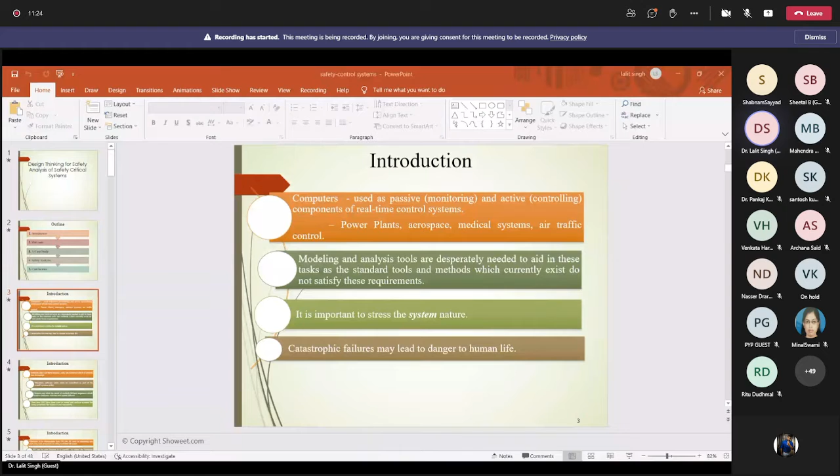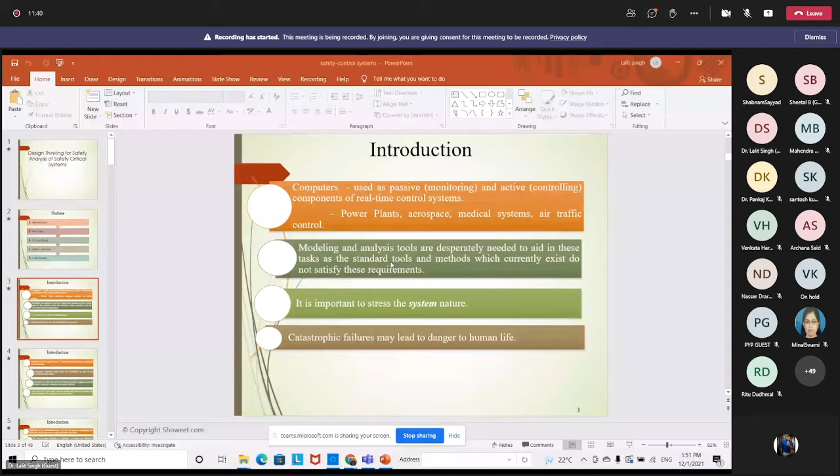Sir, so sorry to interrupt. Can you please put the presentation in full screen mode? I have put it in full screen only. Let me first stop sharing and start again. Madam, now it is coming in full screen. It's okay, sir. And the slides are changing also? Slides I can't see changing, sir. We are on the first slide. Let me then share my entire window rather than this particular slide. Just a moment. Madam, can you tell me now, are the slides changing? Yes, now it is going on fine, sir. Thank you, madam.

So, let me discuss the topic. So first, let us try to understand safety critical systems. What are safety critical systems? These are the systems, the failure of which can lead to catastrophic disasters, or even to the loss of human life. And there is a wide range of applications where we use such kinds of systems, including aerospace, medical domain, nuclear energy, defense, automobiles, and so on. The failure of these applications can lead to very severe consequences, and hence it is very important to perform the safety analysis of such systems. So I'll be discussing how we can make use of design thinking for performing the safety analysis of such kinds of systems.

So today's outline: first I will introduce the safety background, and then I'll be introducing a mathematical modeling technique known as Petri net, which I'll be using to model my system, and how I can derive the safety aspects from that system, how I can evaluate the safety aspect from that model. So I'll be taking a real case study and then I will perform the safety analysis, and then we can conclude the session.

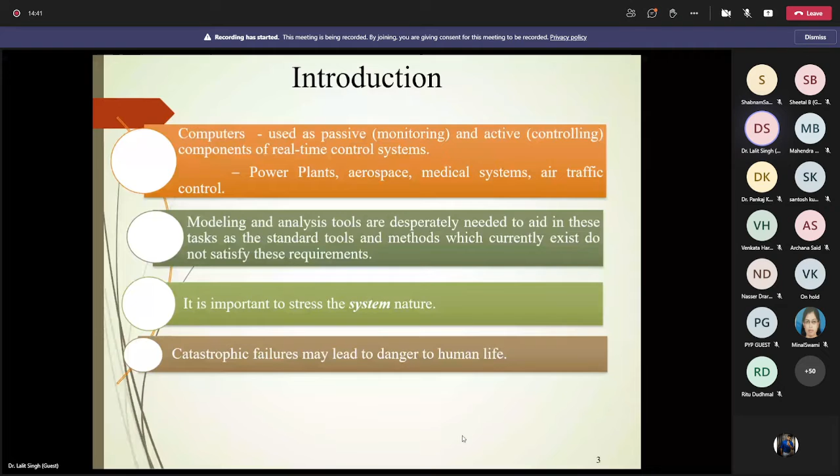And we all know these systems are not standalone software systems or standalone hardware systems, but they comprise hardware as well as software components. And we know software does not harm anyone, only the hardware can harm, but ultimately the hardware is being controlled by the software, and hence software safety must be considered as a part of overall system safety. And disasters are often the result of multiple failure sequences which involve hardware, software, or human failure.

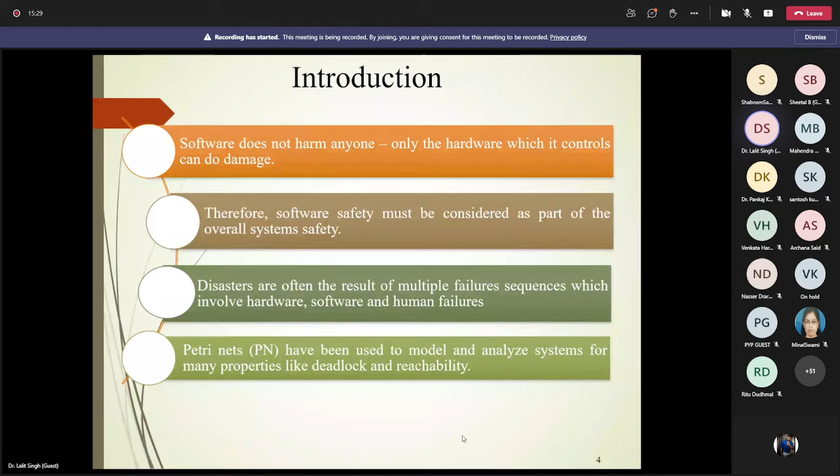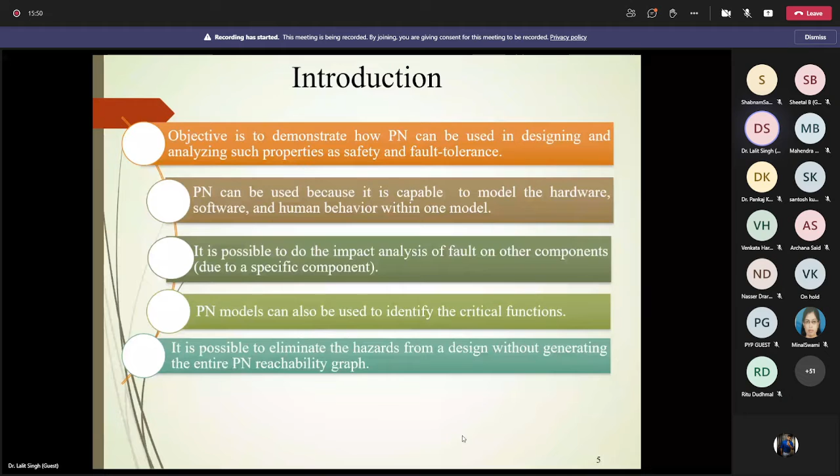So our main objective would be how the Petri net model can assist in designing and analyzing such safety properties related to fault tolerance or multiple failures. So let us first understand the history of the Petri net. When I talk about the Petri net, as I said, it is a very good graphical and mathematical tool. Why a graphical tool? Because I'm able to simulate my system in a graphical form where I can run that particular system, and I can gain enough confidence about what the system behavior could be when it is deployed in real time.

And why is it a mathematical tool? Because we can embed mathematical knowledge in the Petri net, and we can evaluate some critical metrics using mathematics, and those will be the indicators of safety. So it is the best communication between the theoreticians and the practitioners. If you look into the history of the Petri net, the concept was introduced by a German PhD scholar, C.A. Petri, in his dissertation in 1962. And he introduced this concept basically to model stochastic processes.

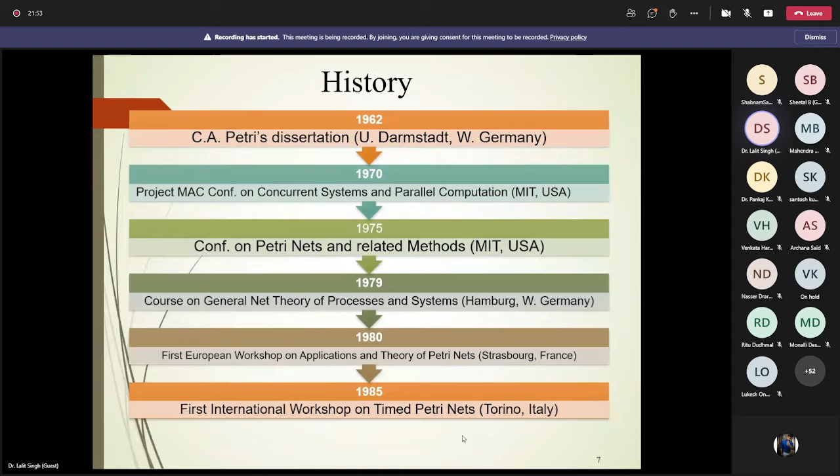Thereafter, it gained popularity, and people from different domains also tried to explore whether this modeling construct can be used for their particular domains. With this objective, the first European workshop on applications and theory of Petri nets was conducted in France in 1980. Then researchers came out with different flavors of Petri nets.

For example, if I want to work on a real-time system, there must be a provision where I can embed timing information. For that, a specialized Petri net known as the timed Petri net evolved. The first international workshop on timed Petri nets was conducted in Italy in 1985. There are other flavors of Petri nets also, depending on your particular application and interest.

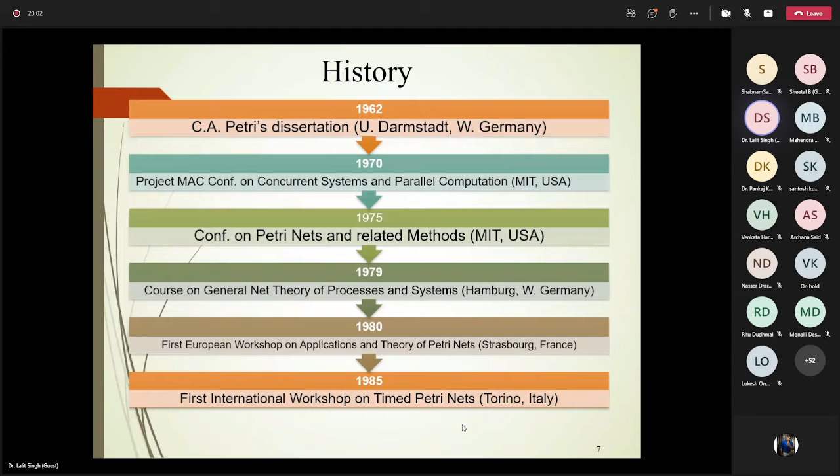Although this is not an exhaustive list, it gives some of the important milestones, which show the importance of Petri nets and how they became popular in industry. So if you look at the Petri net modeling mechanism, suppose I take a very small example: I want to model a small chemical reaction, 2H2 + O2 gives 2H2O.

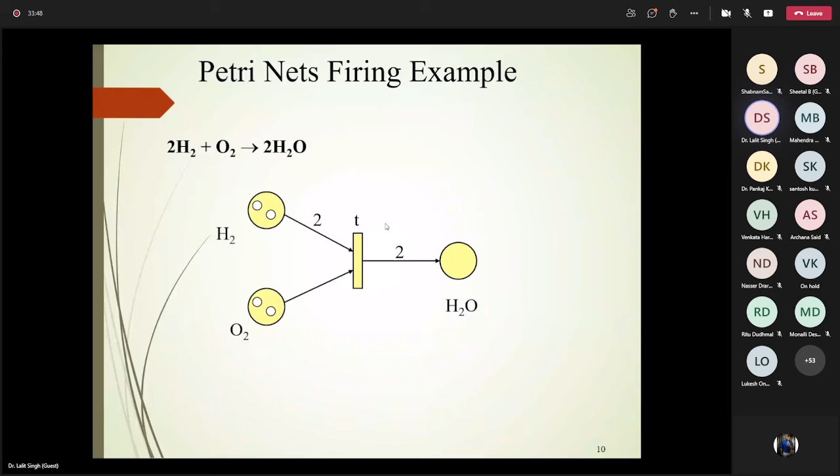And I want to introduce one term known as the reachability graph. As I said, it is a graph. All the nodes represent the state of the particular system, meaning the token distribution, and the arcs represent the transition which is responsible for changing the state. For example, in the reachability graph, the first node will contain 2, 2, 0. So 2, 2, 0 is one state, and then after T, it will become 0, 1, 2, and then it will be a dead state.

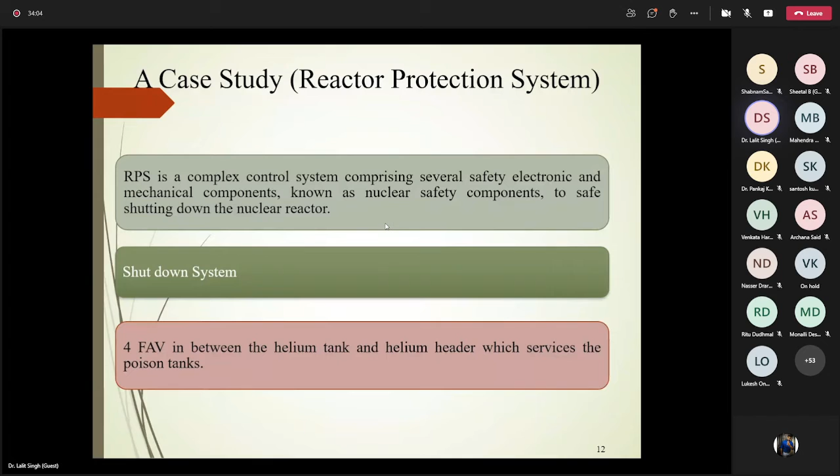And we know when the nuclear reaction takes place, it releases much heat energy. So here a lot of heat energy gets created, and nuclear fission reaction is basically a chain reaction, which is sustained because in every reaction neutrons get generated, and again these neutrons will be utilized to generate a new chain reaction. So the neutron population keeps on increasing, and in every reaction a large amount of thermal energy also gets created, that is 200 million electron volts of energy.

And so, as we have come to know, this neutron is very important, and it is also responsible for the chain reaction. So it is very much important to control the neutron population. Otherwise, what happens? If more neutrons are created, more heat will be generated, and this can jeopardize the integrity of all the constituent components, right? So it may start to melt, or the fuel may start to fail.

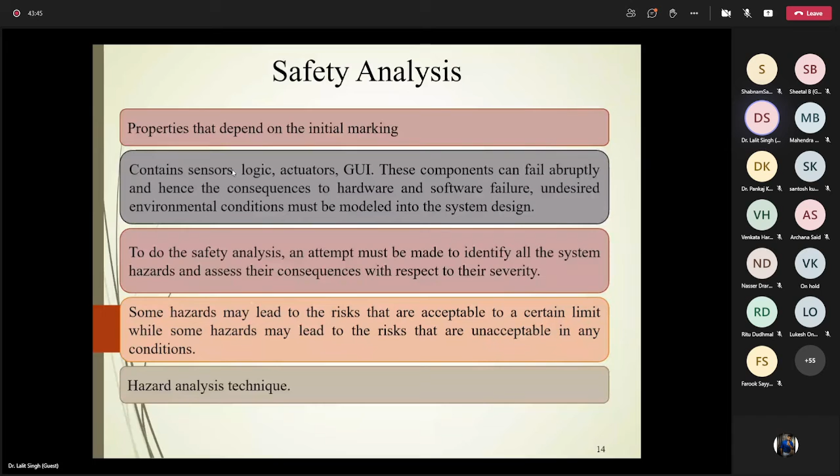Let me explain this. Suppose the PPD place represents that any trip parameter has deviated, meaning there is some demand to shut down the reactor. And this comes from reading the values of the trip parameter. So here there is one token, which represents that there is a parameter trip. The trip parameter is deviating, and then we have to send the signal to energize the relays to close the vent valves, and we have to create some logic condition also.

Logic condition in the sense that when any road construction goes on, you put a flag so that any passenger that comes will know they need to take some alternative path. So the TPD transition represents that the signal has been sent to create the logic condition as well as to energize the relays to close the vent valves. And then if the token comes in PLC on, it means the logic condition gets created.

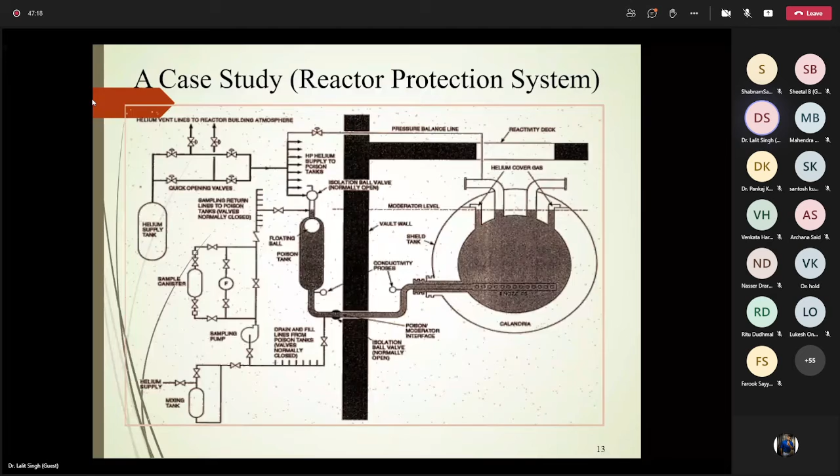So here, the first thing is we have to close the vent valves, and PREVV is a relay that energizes to close the vent valves. And TVVC is the trigger to close the vent valve. And if the vent valve is closed, the token will be deposited in the PVVC.

And then we have to open the fast acting valve. So the TFAVO represents a trigger to open all the fast acting valves. And then the fast acting valve will be opened, which can be analyzed by looking at the token in the PFAVO.

And now, once it has been done, one more interlock we need to put in. Before opening the fast acting valve, we have to check whether the fast acting valve is already not in closed state, which can be checked by the token in the PFAVCD. And if it is not, then only the token can be pulled in PFAVO.

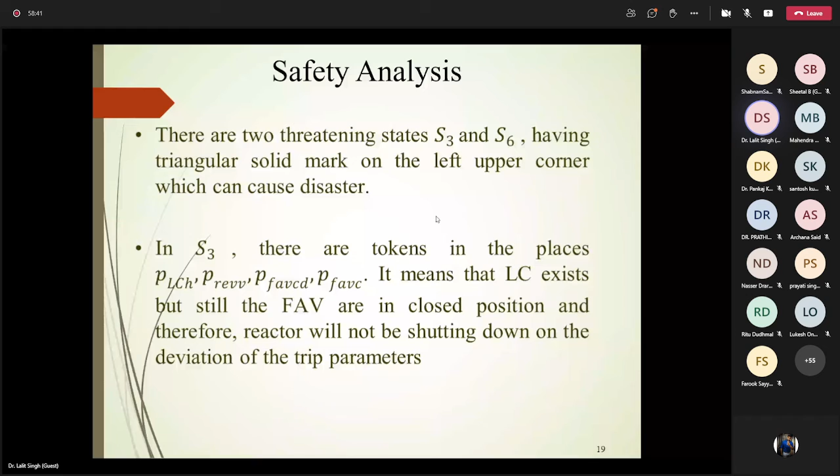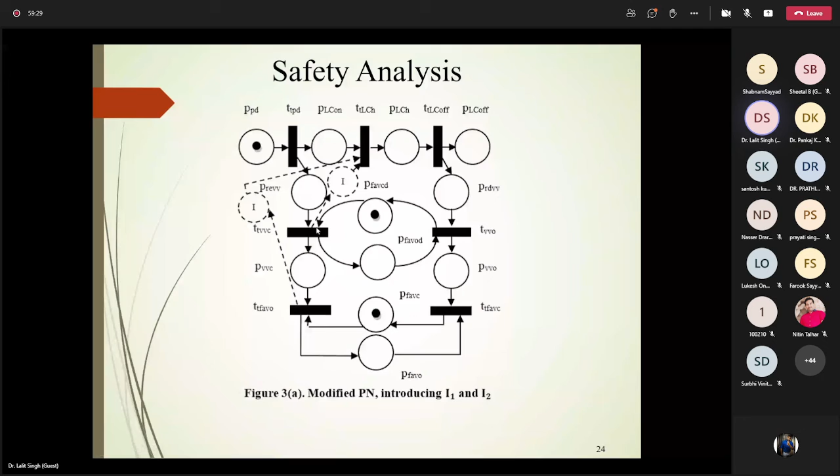So going back to the same figure, we have to first prioritize TVVC and give less priority to TLCH. So the idea is very simple. How we can do it in the modeling: if I want to prioritize any transition and give the least priority to the other transition, I identify these two transitions, put one place in between, and start connecting from the transition which has to be given the high priority. So TVVC has to be given the high priority.

Draw an arc connecting to the new additional place and connect it to the transition which has to be given the least priority. So in this way we can prioritize TVVC, because to fire TLCH there should be a token in this additional place I1. Sorry, one is I1 and one is I2. And the token can be deposited here provided that TVVC has already been fired.

And similarly, we have to prioritize TFAVO. So again, one additional place can be put and connected to the transition which has to be given the least priority. So now my problem is resolved. And to validate, again I can draw the reachability graph. This is the reachability graph considering both additional places, I1 and I2. And here we can find there is no risky state now.

So, but what happened? The story doesn't stop here, because we have to go for the optimization. Engineering is all about the optimization, not only giving the solution, but an optimized solution. So as you can see, these two additional places, I1 and I2, are just an overhead because they are not performing any functional requirement. These are placed to address the safety requirements.

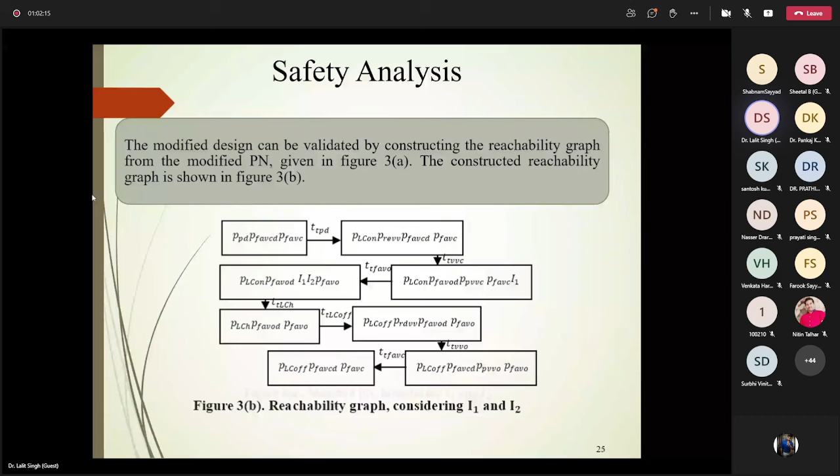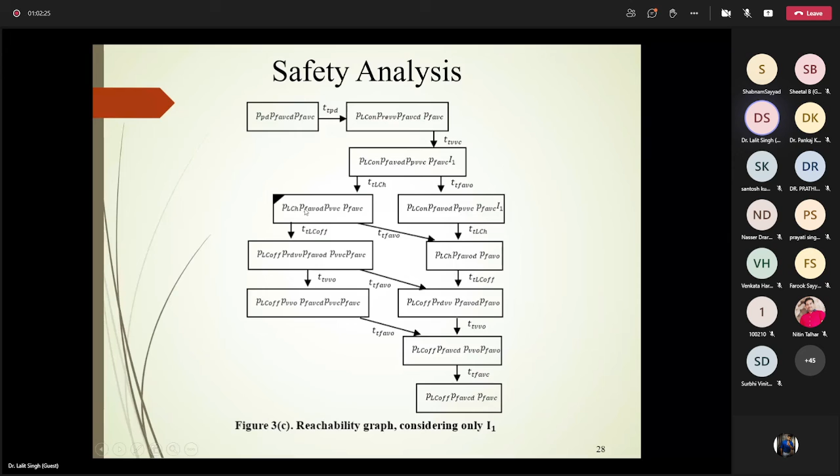So after putting I1 and ignoring I2, this is the reachability graph that I got. And again, we are getting the risky state, so it is not serving our purpose. And after considering I2, we are getting a state which is not a risky state. So it means we can only reduce one additional state. Now let us see how we can implement these things.

So to implement, we have to just prioritize the transition, and we know the real-time operating system provides a feature through which we can prioritize the tasks. So one, we can use the real-time operating system where we can hardcode and prioritize the task. The other way to impose the precedence among the parallel transitions to avoid the risk state is to enforce the firing of transitions as per the defined priority.

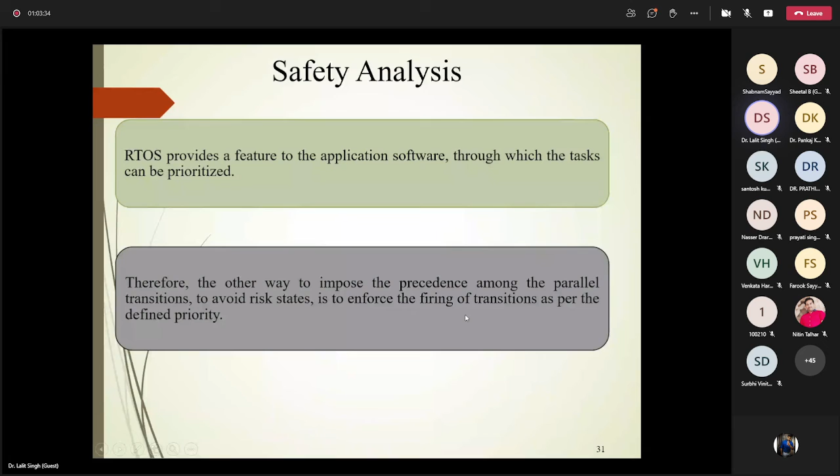So you can put a condition that minimum TLCH is always greater than maximum TFAVO, so that TFAVO will always be fired first. And this constraint must be checked by the hardware or the software logic as per the requirement. If the system fails to meet this constraint, the logic must be built in the design such that the control reaches back to the originating state of the risk state and retries the processing meeting the same constraint.

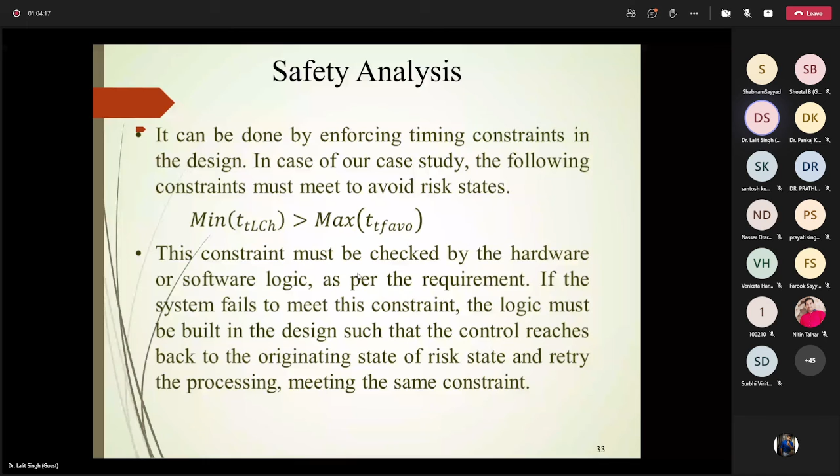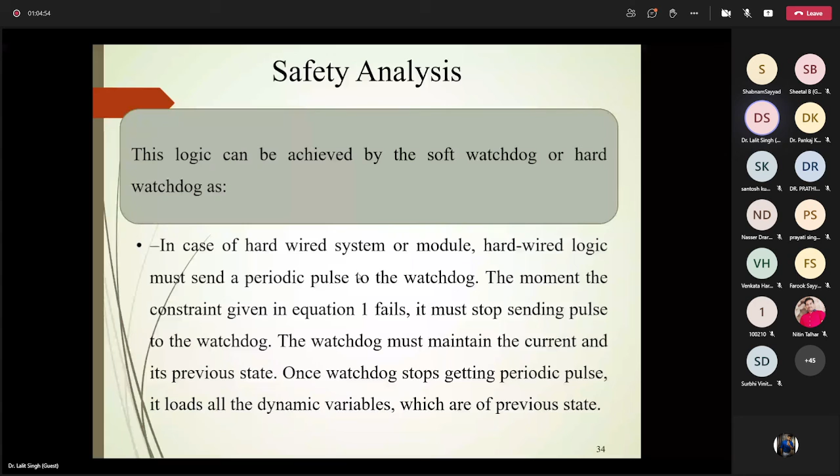And this logic can be achieved by the soft watchdog or the hard watchdog. In case of a hardwired system or module, the hardwired logic must send a periodic pulse to the watchdog. The moment the constraint given in equation 1 fails, it must stop sending pulses to the watchdog. And the watchdog must maintain the current and its previous state. So whenever the watchdog stops getting the periodic pulse, it will load all the dynamic variables of the previous states to ensure the safe state of the system.

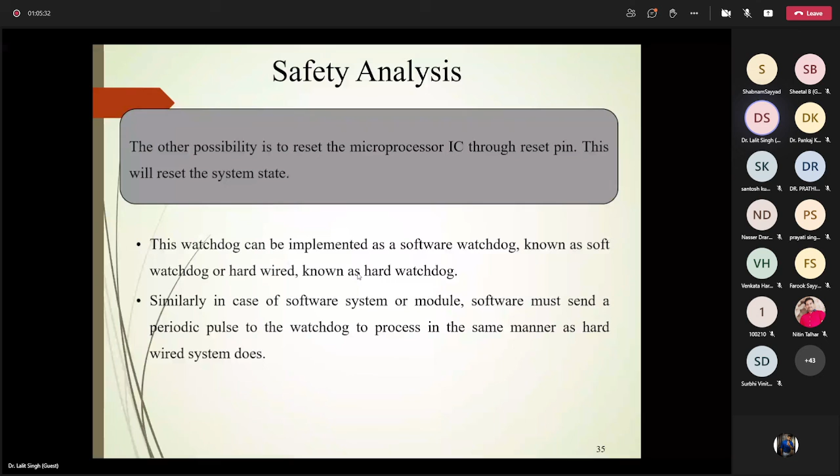The other possibility is we can reset the microprocessor IC through the reset pin, and this will reset the entire system state. And this watchdog can be implemented as a soft watchdog or hard watchdog. Similarly, in the case of a software system or module, the software must send a periodic pulse to the watchdog in the same manner as the hardwired system does. So this is all about the implementation, but we have to consider the other aspects also.

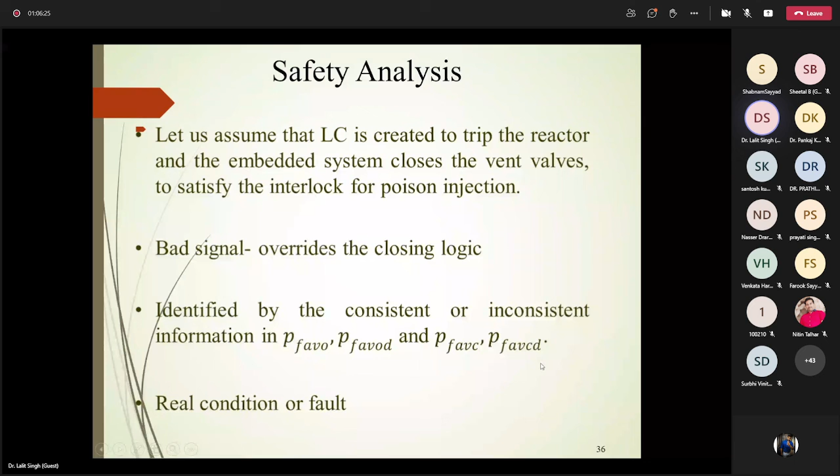For example, a logic condition has been created to trip the reactor, and the embedded system is forcefully closing the vent. The embedded system is trying to close the vent valve, but some bad signal comes to override this closing logic, which can be identified by the consistent or inconsistent information in these redundant places, that is FAVO, FAVOD, FAVC and FAVCD. So there could be a real condition or there could be a fault.

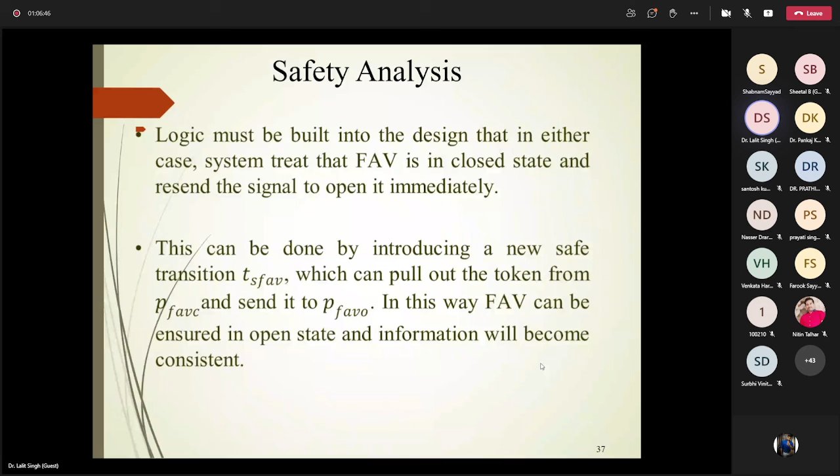So the logic must be built into the design such that in either case, the system will treat the fast acting valve as being in the closed state, and again I have to resend the signal to open it immediately. And this can be done by introducing a new safe transition, TSFAV. So this is a safe fast acting valve transition.

So in such a case, even if the vent valves are not getting closed, we have to forcefully close them, and the fast acting valve has to be forcefully opened. So it will pull the token from the fast acting valve place and deposit it into the fast acting valve open place. And this is how this problem can also be treated.

And so you can see, again there will be the two parallel transitions, the TSFAV and TFAVO. And again, we have to remove the conflict. So it is necessary to impose a constraint which can guarantee the failure detection to wait until some consistent state is allowed. And for that, again, we have to push a similar constraint, that is minimum TSFAV will be greater than max TFAV.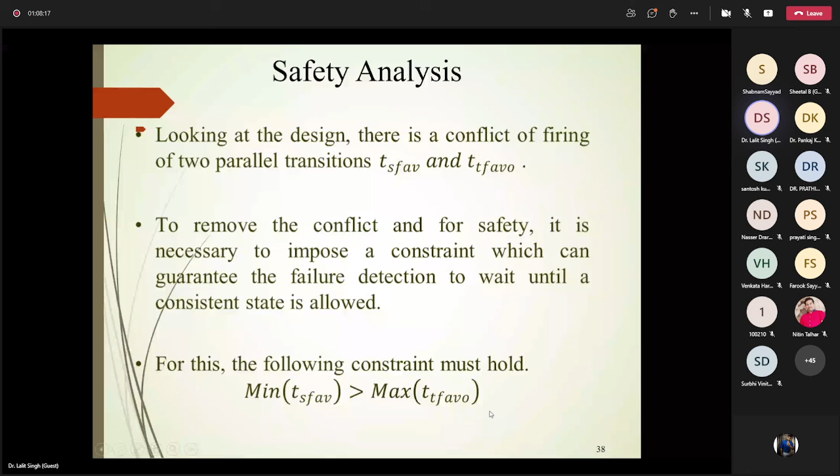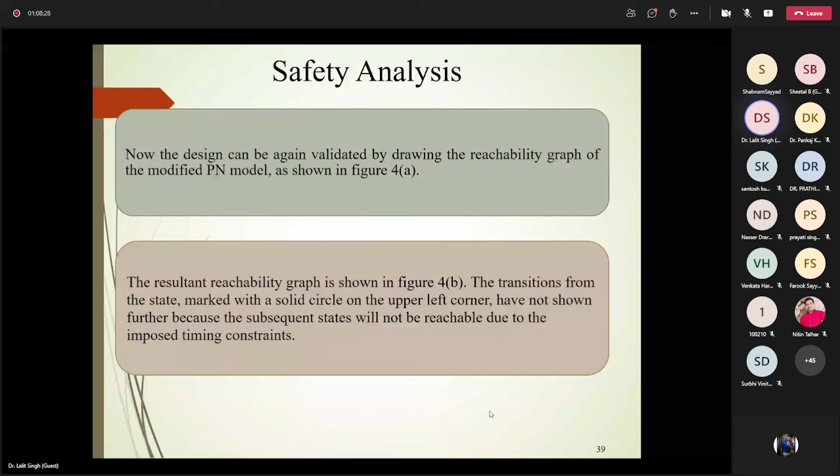And now we can again validate the design using the reachability graph of the modified Petri net model and the resultant. So this is the final model which we could get, and we have addressed some of the issues we have seen. Although the initial solution we found was by introducing the two additional places, I1 and I2, we could meet our requirement by discarding one additional place.

And we have also considered the security aspect, because these distributed systems are distributed in nature. If somehow there is a risk or a security threat, all the time we have to ensure we should be able to open the fast acting valve, and this is a robust model. Robust in the possible ways I can think about. We can look into deeper aspects, for which more deep analysis is required.

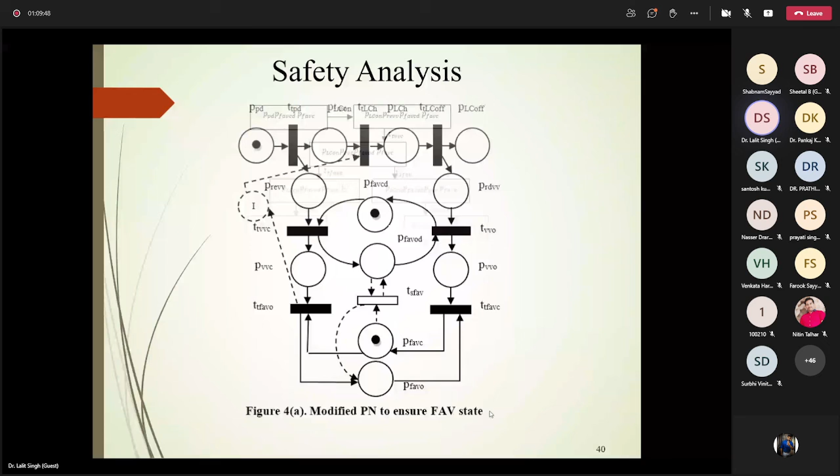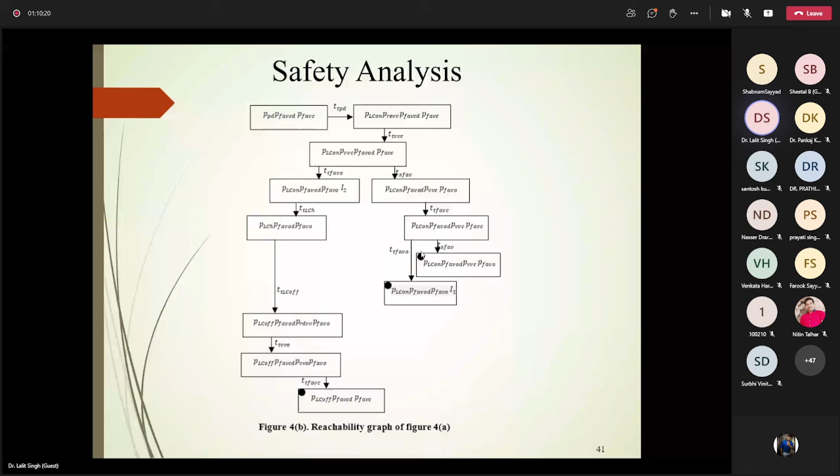And after this, the model has been taken as input to create the reachability graph. So this is a reachability graph where you have seen that there is no risky state, and the states which are marked with the solid circle in the left top are just end states. These are not the risky states, and hence we can go for the implementation using the similar concepts.

Similarly, this analysis can be further investigated for more issues, and definitely it may be a time-taking process. Why time-taking? Because system analysis is required, domain knowledge is required, modeling knowledge is required, analysis knowledge is required, experience is required. So definitely it may be a time-taking process, but the benefits can outweigh them, looking from the safety perspective, which is very important for safety critical systems.

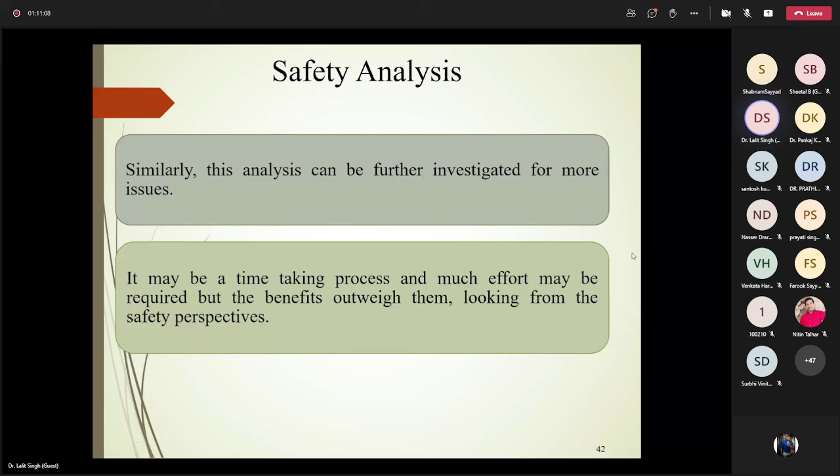So in conclusion, if your system is very large, definitely you will have many places and many transitions. So you can identify the critical functions and emphasize only those critical functions to address the safety feature, and then integrate the entire analysis. The analysis can be done in parts, component by component, or even function by function, if the volume or criticality of the function is high. Similarly, the analysis can be done for the component connectors or the interfaces as well.